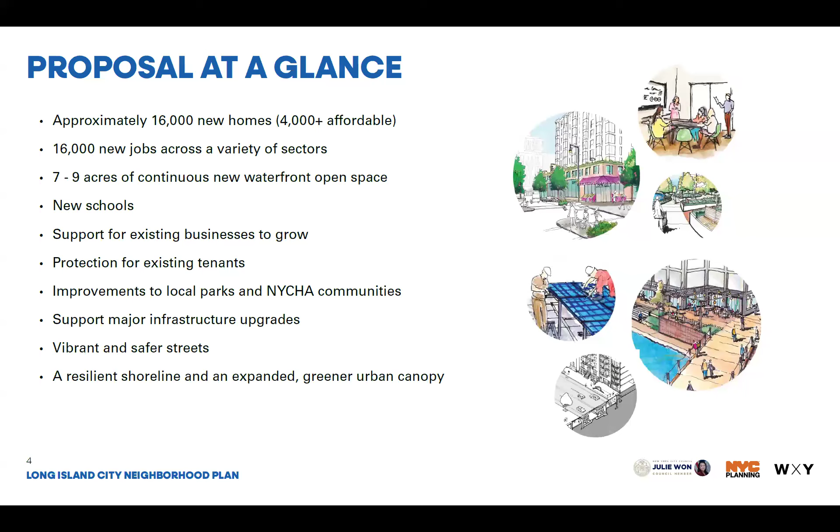The neighborhood plan proposes to support the growth of existing businesses, protect existing tenants, and seek improvements to local parks and NYCHA communities. The proposal seeks to support major infrastructure upgrades, create vibrant and safer streets, a more resilient shoreline, more greenery, and an expanded urban canopy.

For anyone new to this process: OneLIC is a holistic planning process to gain input and build consensus on key neighborhood challenges and opportunities toward the development of a Long Island City neighborhood plan.

The neighborhood plan will include a set of policies, capital projects, and programs and services to ensure that we center quality of life for existing and new residents. It will also include changes to land use regulations, or zoning.

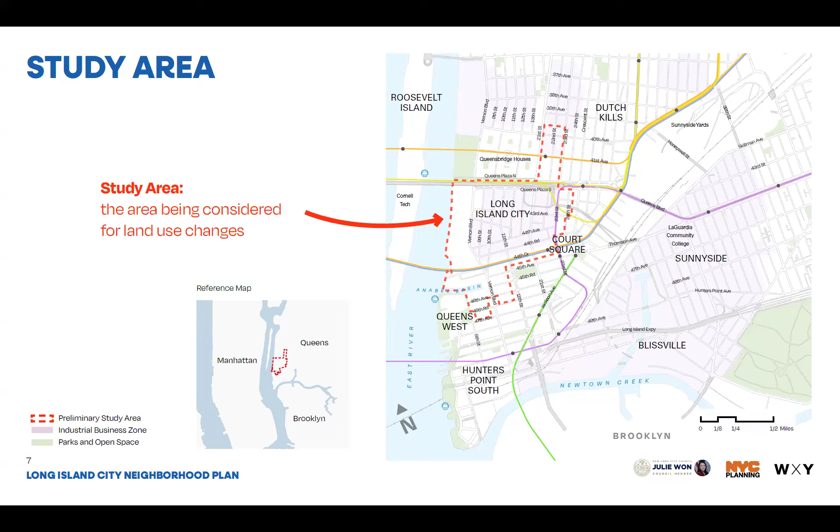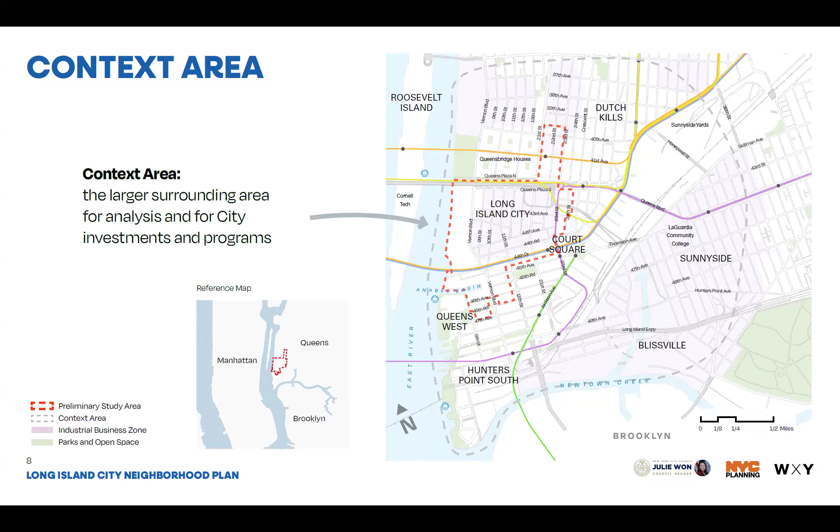This input has been used to develop a set of shared goals for the neighborhood plan and a set of community recommendations that summarize the issues, opportunities, and priorities you've shared. In response, city agencies have now developed a set of draft strategies.

At this stage, the draft strategies are high level, as we want to review and analyze the specific ideas you've put forth. They will be refined over the coming months, and all of the individual comments recorded will be considered as we advance.

Additional public engagement will happen in the coming months, and eventually these draft strategies will be developed into specific proposals for new policies, capital projects, programs, and services. Some of this engagement includes traditional hearings where members of the public will be able to submit spoken testimony.

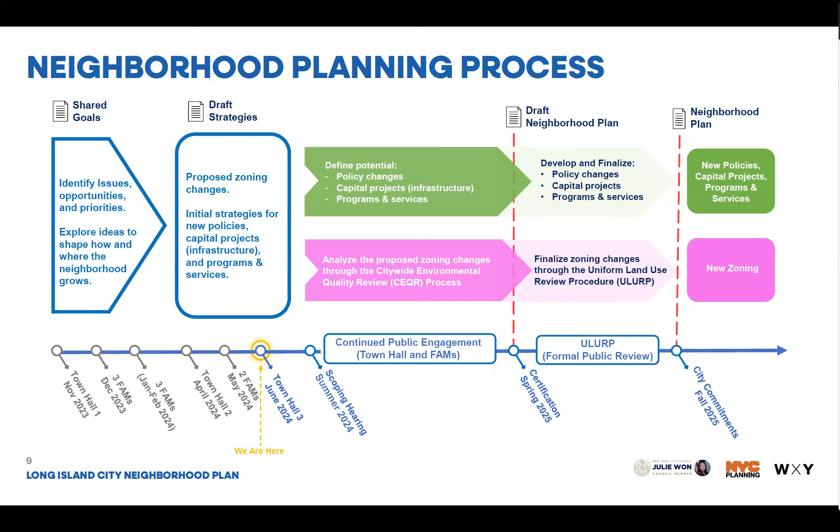Community recommendations. The community recommendations that have informed the development of the draft strategies we're sharing today can be found in documents circulated to discussion tables as well as mounting boards, all of which will be posted online at the project website, licplan.nyc. They are also included in booklets that will be posted to the website as well.

You can access the draft strategies directly online at licplan.nyc or use the QR code on screen. When you get to the website, go to Building the Plan and click on Draft Strategies.

As I stated before, these draft strategies represent the beginning of a process that city agencies will go through in order to develop specific non-zoning ideas and a zoning proposal that will advance the shared goals and respond to the community's recommendations. In the coming months, while the zoning proposal advances through environmental review, there will be additional opportunities to workshop these draft strategies by bringing you into conversation with city agencies.

The proposals that will be captured in the draft neighborhood plan represent a chance to plan holistically for the area's future by coordinating investments across multiple agencies. We can address things like open space access, investments in cultural amenities, educational resources, and infrastructure like schools and streets.

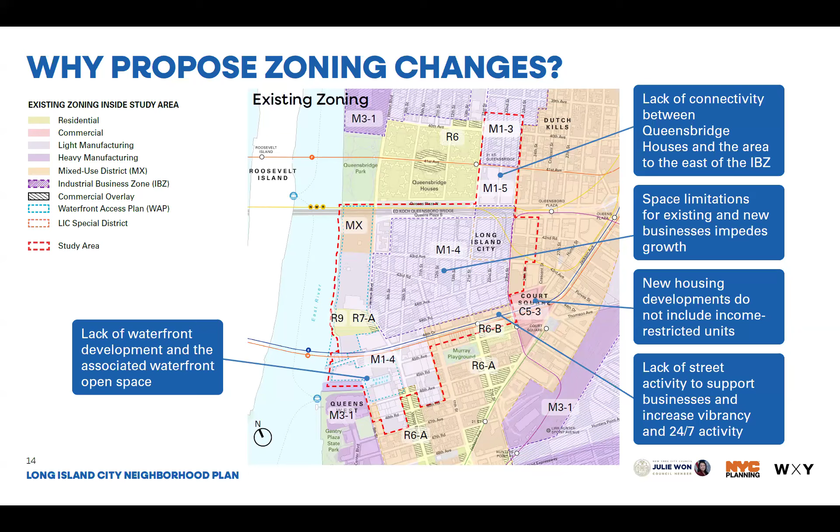We will now go through each of the 4 sub-areas shortly, but before doing so, we'll share some high-level feedback that we received that applies across the entire study area. We heard concerns that the proposal would not result in a neighborhood focal point, something like a town center.

Some felt that Vernon Boulevard can be better leveraged as a central corridor in the neighborhood. We heard that more non-residential uses like businesses and community facilities are needed.

There were questions about the number of affordable housing units that might be produced generally, and if those would be located near transit. Some felt that the proposed density would do well to produce a lot of affordable units through the city's Mandatory Inclusionary Housing Program, or MIH, while others did not think that MIH does enough for the people who need housing the most.

There were questions about how zoning changes could support more active ground floors to generate more foot traffic for small businesses and increase vibrancy.

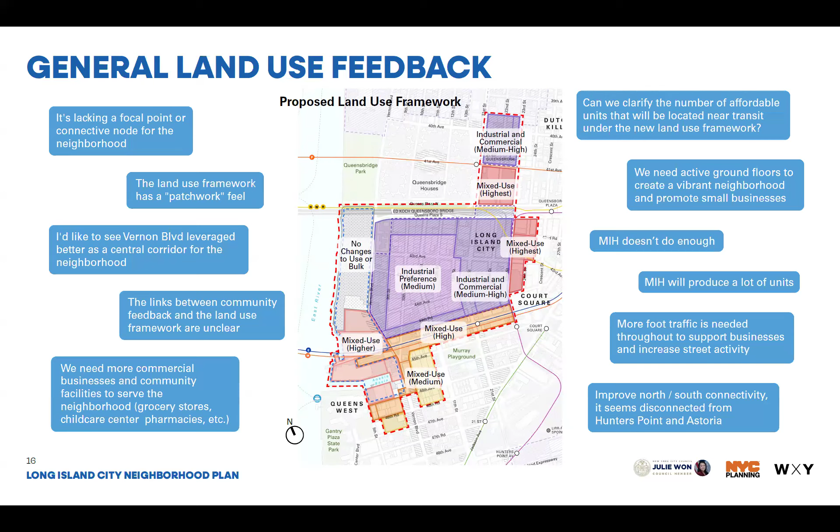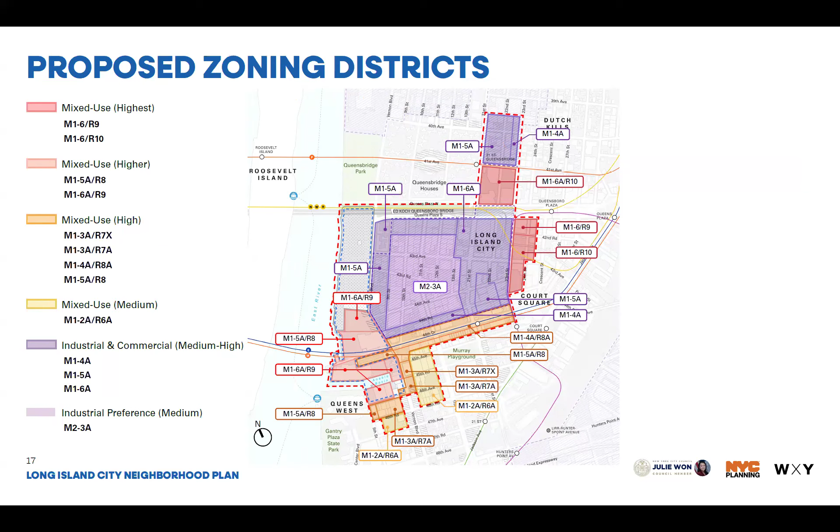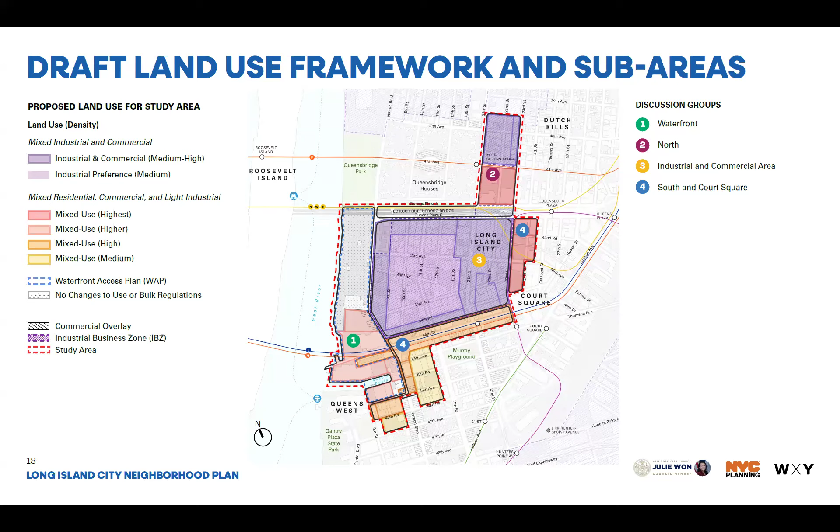There's a lot here, so we'll take a look at sections of the study area one at a time. Like we did at the last meeting, we'll break the framework down into these 4 sub-areas: 1, waterfront. 2, the northern portion around Queensbridge houses. 3, industrial and commercial area. And 4, the mixed-use areas to the south and near Court Square.

Starting at the waterfront, there was a lot of excitement about a continuous public waterfront and concern that plans not to change the northern part may be short-sighted and may prevent waterfront continuity. We heard hopes to further break up waterfront blocks to allow for more access to the river. Some folks felt the high-density mixed use proposed around Anable Basin is too much development, while others saw the waterfront as an ideal location for high-density development.

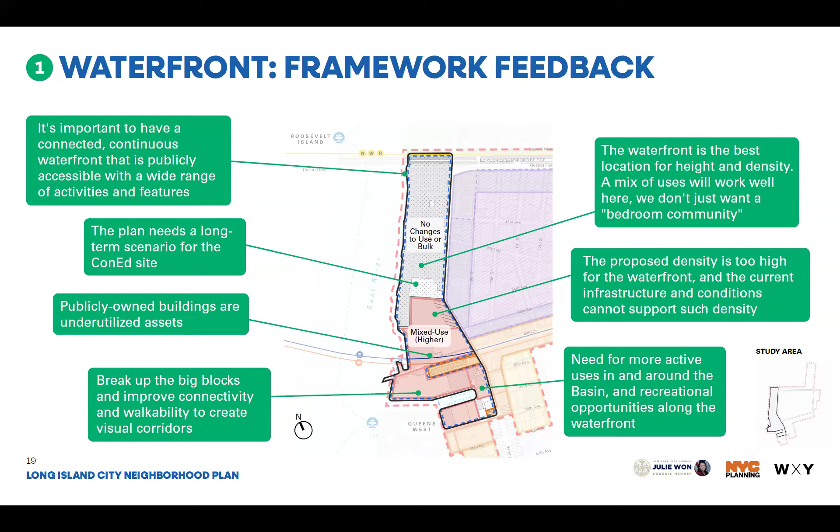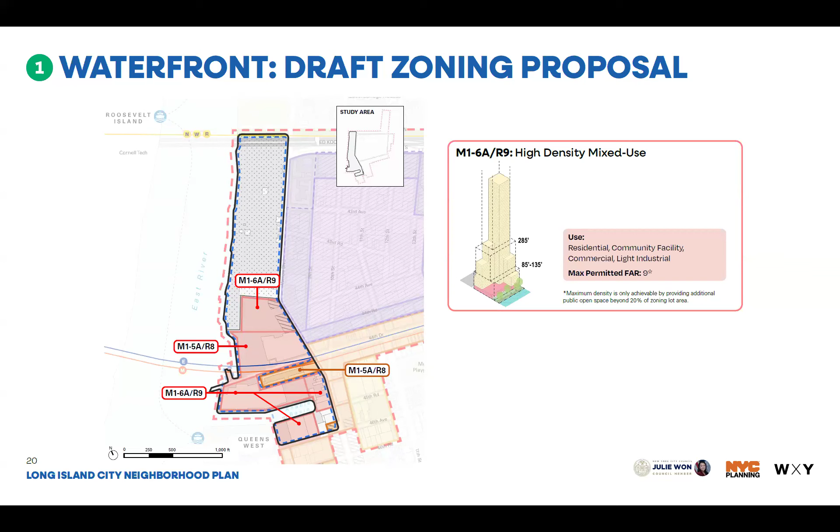It seemed that most people do want to see a mix of uses here with active ground floors, not just residential buildings. As we shared at the last meeting, in the zoning proposal, the areas on the southern half of the waterfront around Anable Basin will allow for high-density mixed-use buildings that accommodate all uses, including residential. This diagram will be printed on tables and is available online, and shows the envelope that new buildings would have to fit inside, as well as the proposed maximum densities.

On the left here is a photo of Vernon Boulevard and Anable Basin today. There's no public waterfront access to the basin, among other existing conditions that deter the public from accessing open space, including a lack of pedestrian crossings.

With the proposed changes, we anticipate new development that would include housing with units that are permanently income restricted. We anticipate both visual and physical access to new waterfront open space that would be developed around the basin, and regulations along the waterfront with flood resiliency measures in place that include pervious surfaces and stormwater management.

In the environmental review, the city can also analyze traffic conditions that will help inform if measures like new pedestrian crossing locations and traffic signals are needed to connect people safely through and across Vernon Boulevard to the waterfront.

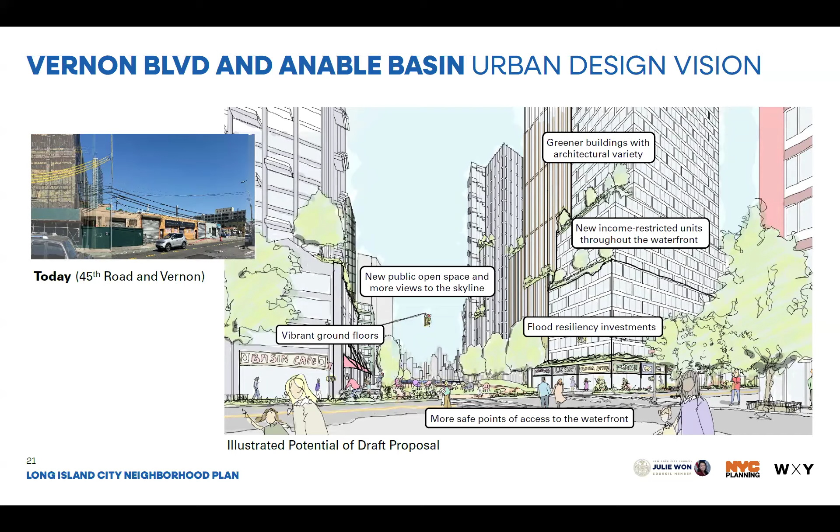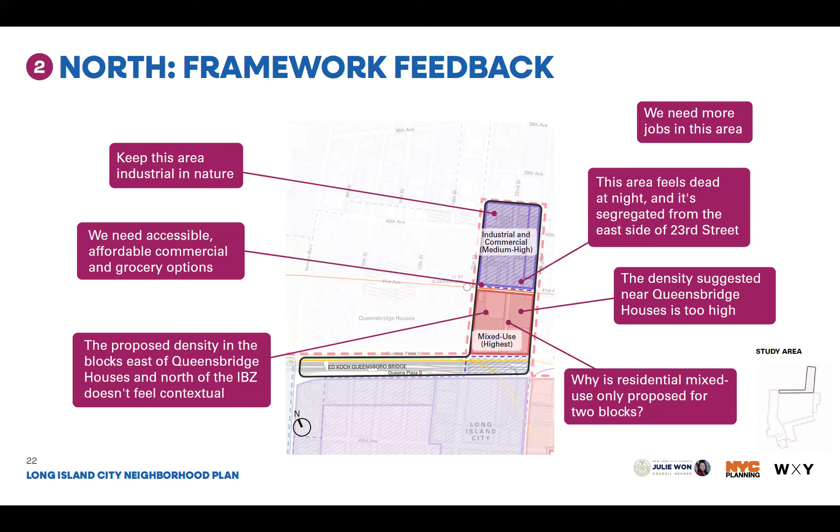In the north area, next to Queensbridge houses, we saw hopes for more employment opportunities, and those who want to keep industrial uses in the area, those who felt that the proposed density may be too high, and concerns that the area feels dead today, and questions about why only 2 blocks in red are proposed for mixed-use development that would include new residential uses.

The proposed zoning districts next to Queensbridge houses here would allow for medium-density manufacturing in the northern area that's shown in purple, and high-density mixed-use buildings, including residential, between 41st Avenue and Queens Plaza North.

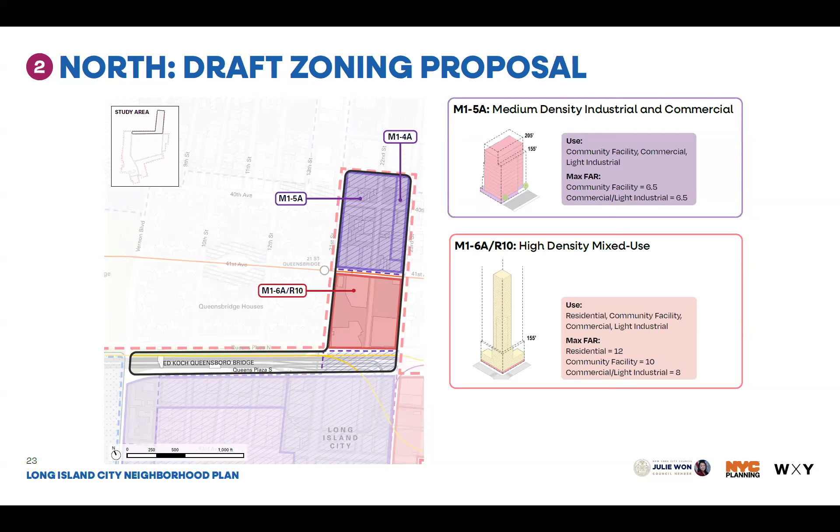In the industrial and commercial area, there is concern that the proposed zoning will not support enough street activity with active ground floors to support small businesses. We heard that this area feels disconnected from Queensbridge houses and the blocks to the north.

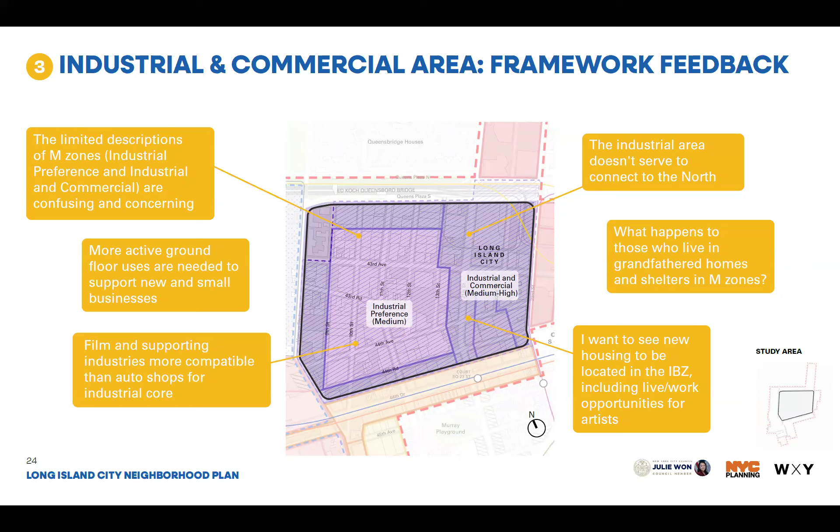Some people raised concerns that the plan does not adequately address the people who already live in the industrial business zone, the IBZ, in homes that existed before the current M districts were mapped here. And we heard from many folks who want to see new housing permitted in this area.

In the industrial and commercial area, the darker purple around the edge would allow for medium to high density industrial and commercial development. The lighter purple area in the center would allow for medium density industrial and commercial uses with a preference for industrial space. All areas here would allow for higher density development than they do today, and would continue to restrict new residential from being developed.

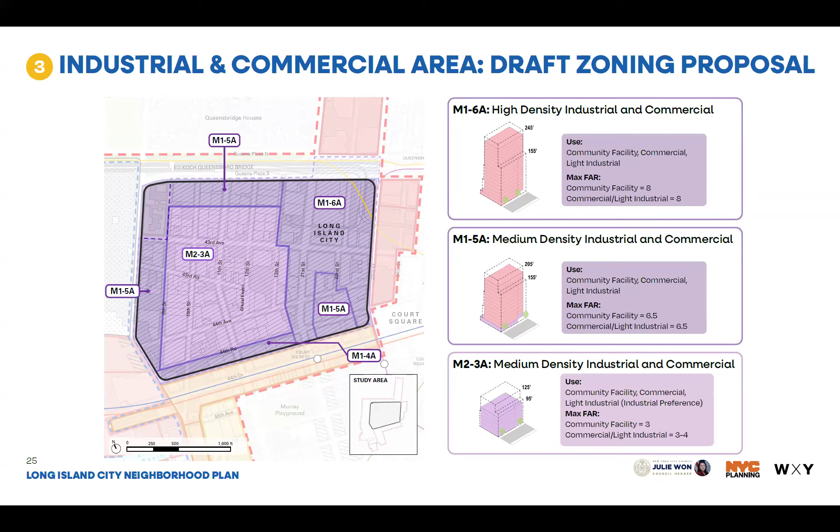Finally, in the blocks south of the industrial business zone and around Court Square, there were hopes to see more housing and higher density development along 44th Drive to encourage a corridor with active shops. We also heard concerns that the blocks around Court Square in particular are in need of more open space, and this plan does not seem to address that.

Please note that each of the corresponding sub-area discussion tables will have printouts of this feedback available for your reference, as well as available as PDFs online, for discussion and comment on the proposed zoning.

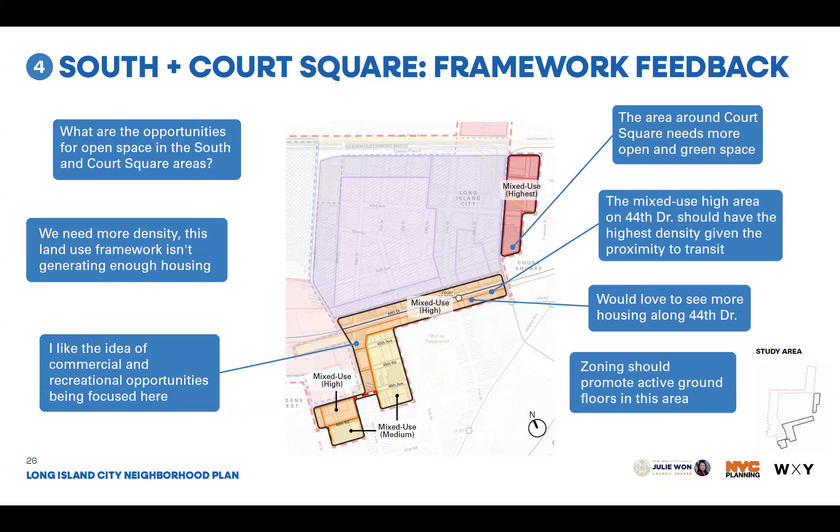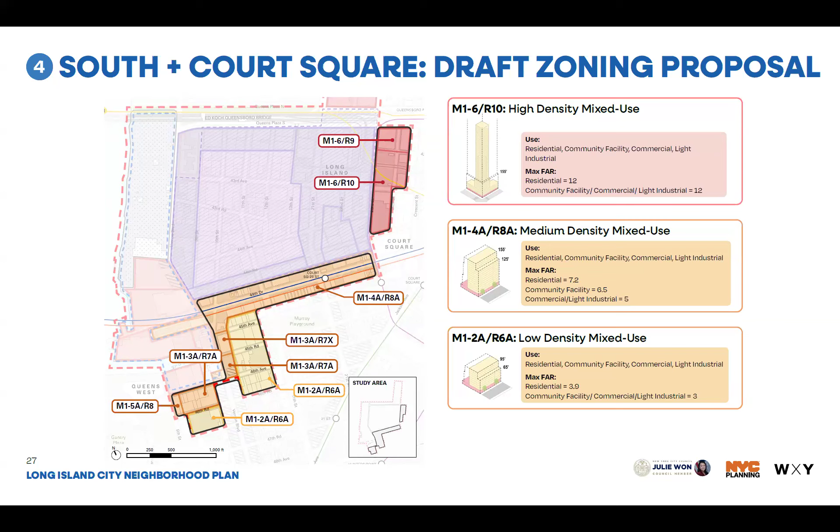A look at the detailed proposed zoning in this area. Around Court Square, the city is proposing high-density mixed-use development. Along 44th Drive, medium-density mixed use is proposed. And in the areas south of 44th Drive, medium to lower density buildings transition into the existing neighborhood fabric.

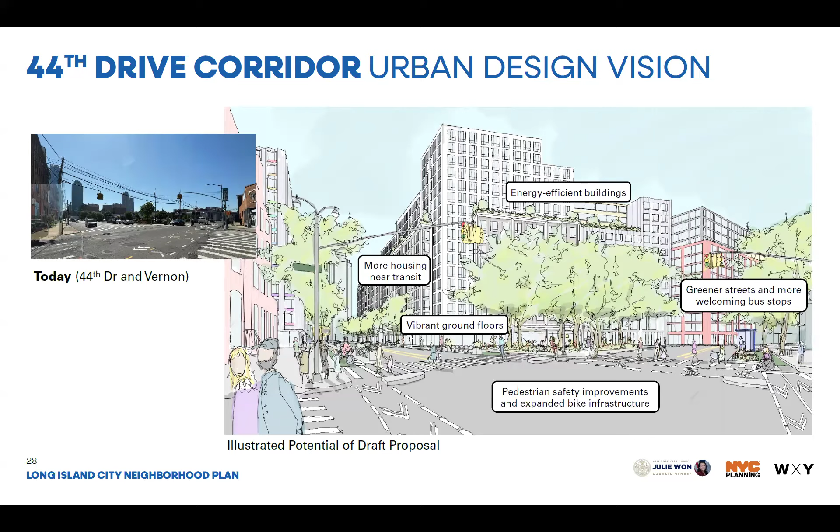Now let's take a moment to talk about some of the things we heard from the community that we do not anticipate will advance through this process.

First, a lot of people have asked, why can't we allow residential in the industrial business zone? The city is standing by its citywide commitment to keep new residential uses out of the industrial business zones and retain them for non-residential uses that provide jobs and services. However, an important part of this neighborhood plan will be to support greater business growth and overall investment in the area. Separately, the city is due to publish an industrial action plan next year, and this may be an opportunity to rethink the IBZ policy on a larger scale, which may also impact LIC in the future.

Secondly, some people have asked, why isn't the city only allowing for low or medium density development? In the city's assessment, this area is ideally suited for higher densities, with Long Island City's public transportation access and proximity to Midtown Manhattan. Places close to the study area at Hunters Point South and Court Square also support higher density development today, which puts the proposed density in a similar context.

Another question we have received: why can't we prohibit new development in the flood zone through managed retreat? We know that many of you are concerned about the possibility of new high-density residential construction along the waterfront and in the floodplain. We understand this concern, but believe that the proposed approach to develop a resilient shoreline is a stronger approach that also advances multiple shared goals. We know that no waterfront barrier or sewer expansion will completely prevent flooding in major storm events. However, without waterfront redevelopment, there is very limited potential to add new public space and flood resiliency measures.

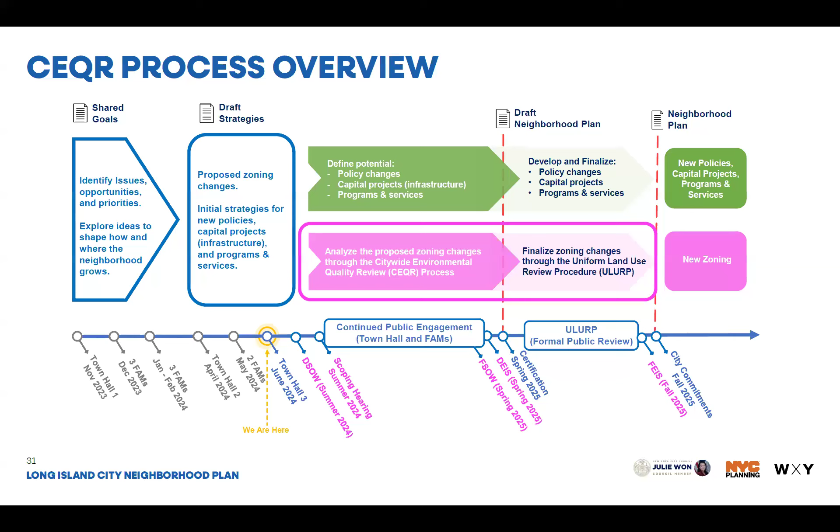The Citywide Environmental Quality Review, or CEQR for short, is the name of the city's environmental review process. CEQR allows participants in the public review process to evaluate project benefits and the new needs that they might produce. It also ensures mitigation measures are identified for adverse environmental impacts.

EIS studies are comprehensive and can address a wide variety of impacts from land use and zoning changes. That includes socioeconomic conditions, open space, natural resources, infrastructure, traffic and parking, and public health concerns, to name a few.

The public plays an important role in the environmental assessment through the scoping process. The city's first step will be to share what they plan to study. This is the draft scope of work, or DSOW. It explains how the environmental analysis will be conducted and identifies initial impacts under this umbrella. We will update licplan.nyc when the draft scope of work is published, which we anticipate being in July.

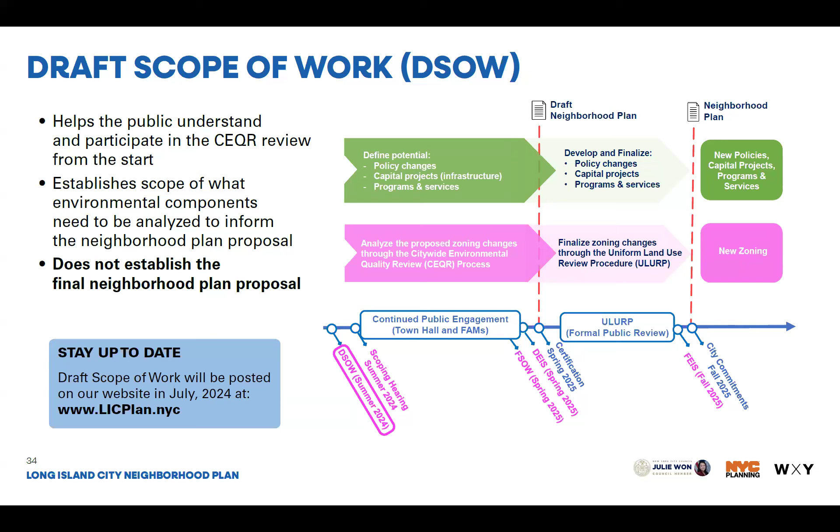After the release of the draft scope of work, a public scoping hearing must be held within 30 to 45 days, where the proposal is shared and members of the public provide insight and feedback on areas that need to be studied. So if you are concerned about a potential effect of changes to zoning, scoping will be the place to come out and make that known.

We anticipate the scoping hearing will happen in August. The scoping hearing will be held virtually online. In addition to attending the scoping hearing online, you will also have the option to submit written comments on the draft scope of work until 10 days after the scoping hearing.

After the scoping meeting and the public review process, a final scope of work is produced that incorporates the public feedback. Once the final scope of work is issued, there will be several months of analysis and detailed research in partnership with other agencies that's produced. A draft EIS, Environmental Impact Statement, is produced to disclose environmental data for public comments before the certification of the neighborhood study. And both the draft EIS and the land use application enter the formal uniform land use review process.

Following this comment period, a final EIS is issued that incorporates feedback from the public and is shared 10 days before the City Planning Commission hearing. At City Council, the final EIS, FEIS, is a document that captures the scope and comments of all members of the public.

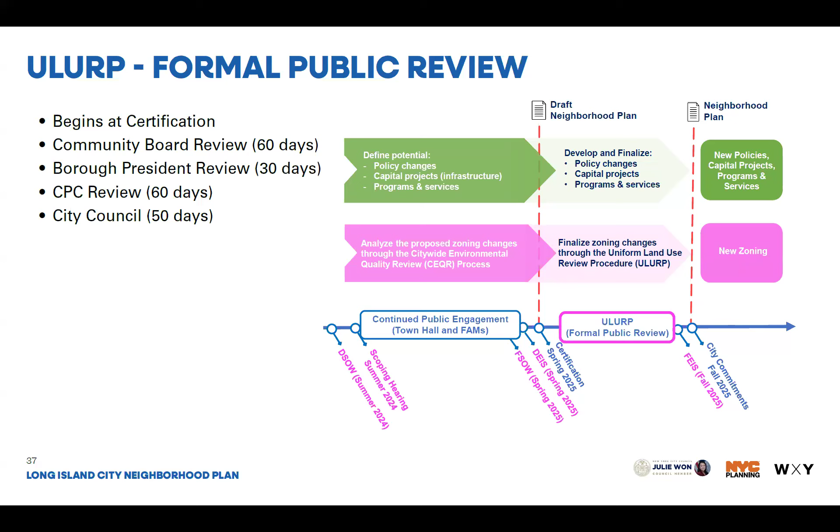Now, before moving into the discussion, we want to acknowledge all the work that has gone into this process so far from you all, members of the public, and all the folks who've joined us at these meetings and submitted public comments so far. Since last October, over 1,200 of you have joined us at 15 meetings, sharing more than 3,700 comments about the future of Long Island City.

Thank you for your time, passion, and your ideas. We appreciate your input to this process, and we'll be sure to include it as we work to develop and improve this proposal for the future of Long Island City.